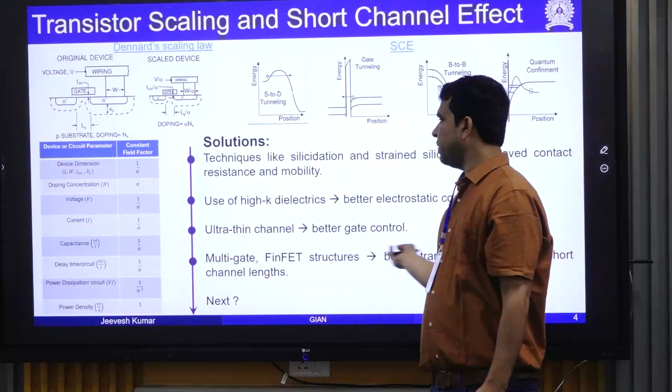So consistently this kind of evolution happened, right? And which evolution happened for what, that you can explore. That's a broad domain of course, there can be a separate course on that. But this kind of evolution happened consistently. Question again comes, what will be the next? So what is the main challenge now?

I'm explaining you what. Let's think about the material. This is a standard silicon material. Earlier, if carrier has to flow, the carrier was flowing into the bulk. If carrier was flowing into the bulk, all sides had a standard bonding. So there was no significant problem in flowing the carrier. If you read about a standard Kronig-Penney model and standard device physics, if the material is pure, then carrier will not have problem in flowing.

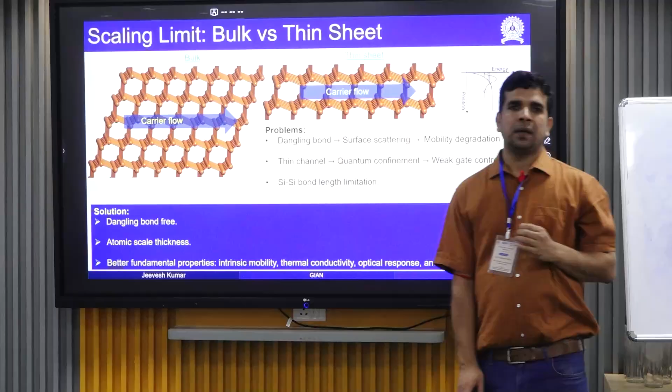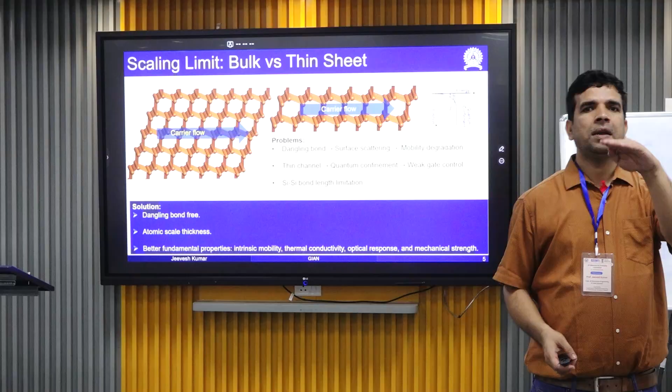But if you thin down the complete system, then what will happen? Surface has the dangling bonds. Dangling bond means something which is not bonded. Because in a standard silicon, a silicon in the bulk is bonded with 4 different silicon atoms. But for the topmost silicon atom on the surface, all its orbitals are not filled; it's a dangling bond.

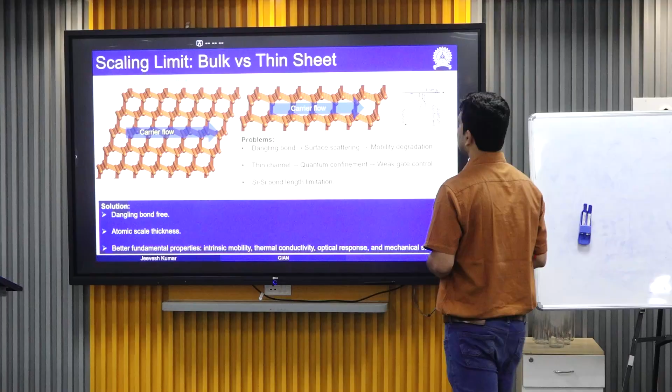So once the carrier flows through this, carrier can get trapped into those dangling bonds. There are unbonded orbitals which want to pick up carriers, so electron or hole can get trapped. This is a standard term in device physics known as surface and boundary scattering. Scattering means the electron gets scattered from the standard flow by the surface or dangling bonds. So if you shrink down consistently, your surface and boundary scattering becomes huge, and that will dip your mobility.

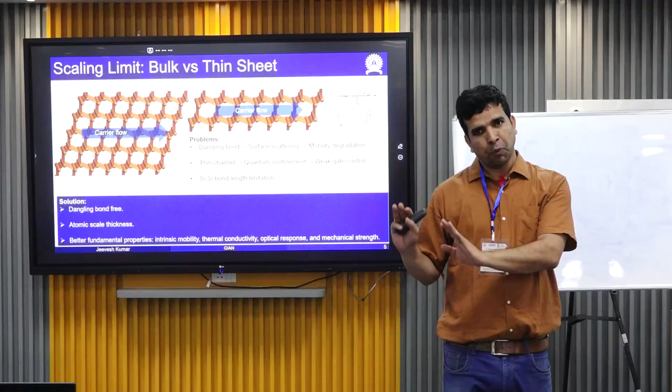So your mobility will get dipped down, and ultimately, if your mobility dips down, your device will be slow. There are many other problems, but this is the most fundamental problem. If you go for scaling, there will be a limit beyond which you cannot further improve the scaling in silicon. Different technologies are doing something else, but they are not ultimately modifying the scale.

Another problem is, if you study quantum mechanics, you read that if you confine any system, meaning you put boundary conditions, your probability of finding the electron or carrier at the edge will be less. So the carrier will try to be in the middle. It depends on which mode you are talking about, but the carrier will go away from the edge.

If the carrier goes away from the edge, then to control the carrier you have to apply more voltage. If the carrier is closer to the surface and you apply voltage on the surface, you can control the carrier easily. But if the carrier goes away from the surface, controlling it will be difficult. You have to give more and more voltage. So these two are standard problems.

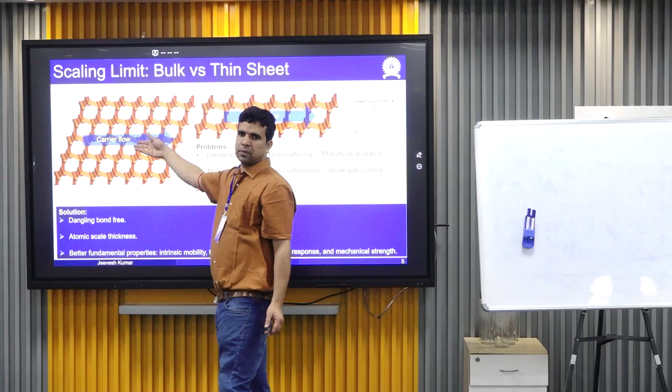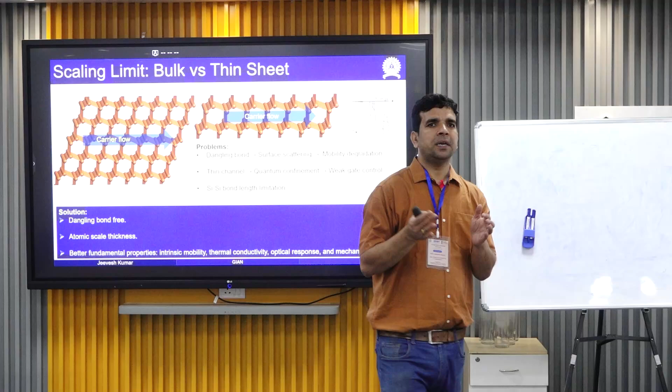It's the other way around. For the mobility part, you try to keep the carrier away so that you don't have more boundary or surface scattering. But if you keep your carrier away, controlling it will be difficult because you have to apply more voltage. So you want it near the surface. These are the standard problems: mobility degradation and weak gate control. And if you shrink down consistently, at some point there will be a silicon bond limit.

So what would be the solution? First, make your surface dangling bond free, so that boundary scattering, especially surface scattering, goes away. Second, go to very thin atomic scale thickness, so the electron has no space to go away from the surface. Atomic scale thickness means the electron will be confined in that atomic scale thickness only, so you can control it from the gate.

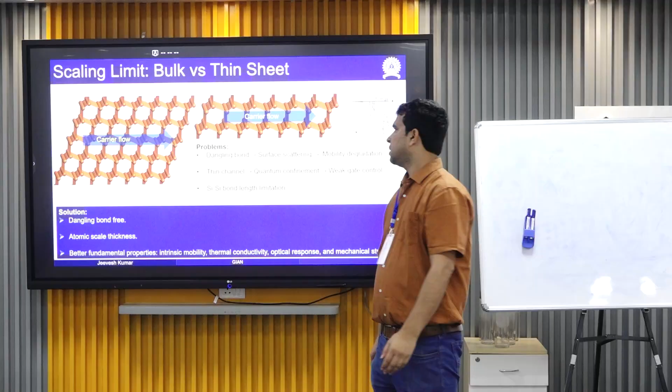And another is to find some material which has better fundamental properties than silicon, or at least comparable to silicon, with dangling bond free surfaces and atomic scale thickness.

Okay. So people started thinking about that. So what is the minimum thickness so that the charge will be only on the surface, free motion? That will depend on how much voltage you are applying from the top. That's what I'm saying. If you make it very, very thick, there's nothing for minimum. It all depends on how much voltage you are applying and how much your boundary potential is.

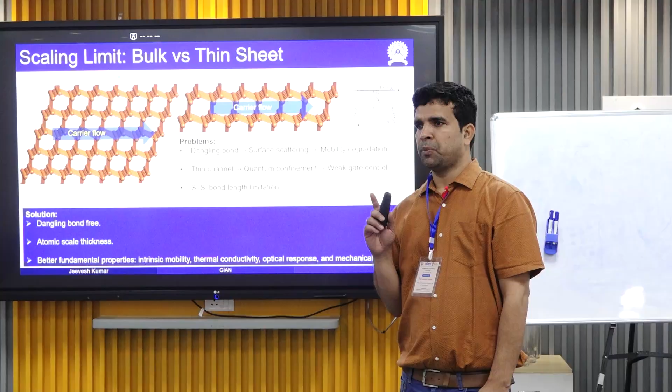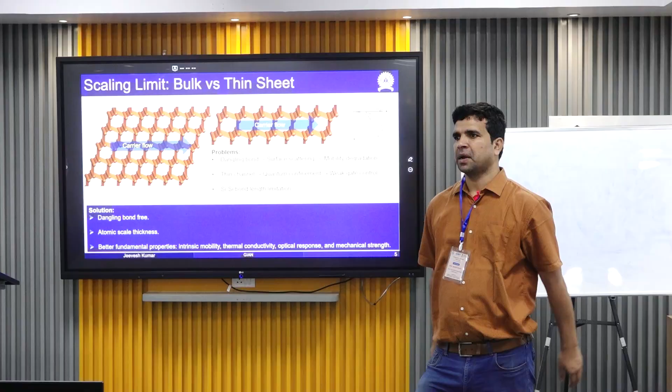If you solve the Schrodinger equation, then based on how much boundary potential you are applying and which mode you are talking about, wherever you get the peak of your charge depends on that. So it will depend on how much your boundary potential is. So there is a concept of minimum. Even if it's larger, if you handle the fundamental mode, then you can get it. So it depends on different conditions. Right.

So what are people doing basically? People are working in two fields. On one side, industry mostly, and of course some academia also, they are trying to stick to silicon only, and they are trying to evolve different kinds of transistor architecture to deal with this technology. If you study the history of the transistor, earlier it was the planar transistor, then the bi-gate transistor came, multi-gate transistor came, FinFET came.

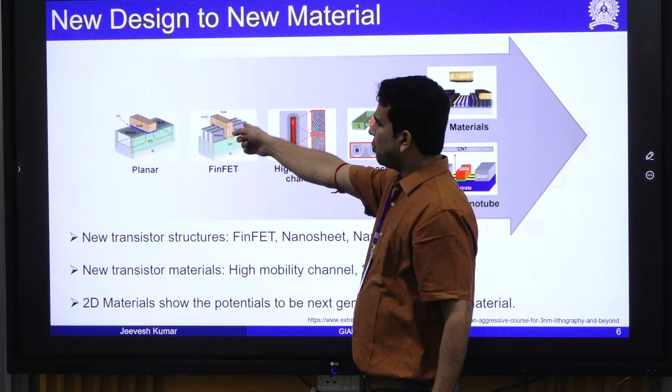They are dealing with these problems mostly by having more gate control. Since the carrier is going away from the surface, they are wrapping the gate around the channel. Let's say this is your channel: earlier the gate was only on the top, so they were controlling the channel from the top only, but then bi-gate came, you have a gate on this side also, then FinFET came, bringing gates on this side and this side also, so that you can control from all directions.

Then something more advanced, gate-all-around, came. That means wrapping the gate around the channel so that there is control from everywhere. Then they strained the channel so that they get high mobility and all those things. So basically, they are consistently improving the transistor architecture to deal with different technologies.

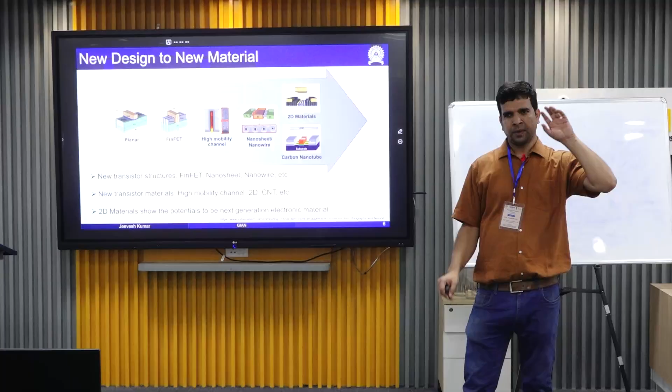And the other community, the research community, is trying to modify the material, different materials. So two sides. One is industry or some academia, they will refine the silicon transistor, but they know that sometime a limit will come. On the other side, people are trying different materials which can replace silicon in future technology. And from this point, 2D materials came into the picture.

Okay, so why did 2D materials come into the picture? Because of three fundamental reasons: dangling bond free, atomic scale thickness, and better properties than silicon. At least, there can be others also. And 2D materials satisfy all three criteria. So what is a 2D material basically?

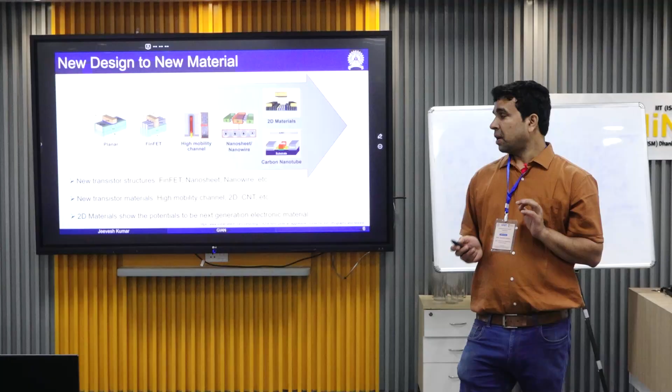In nature, 2D materials all exist in bulk form only, not in planar form. But as already discussed, 2D materials have in-plane sigma bonds. They are bonded in plane only. And out of the plane they just have van der Waals stacking, like one layer on top of another layer.

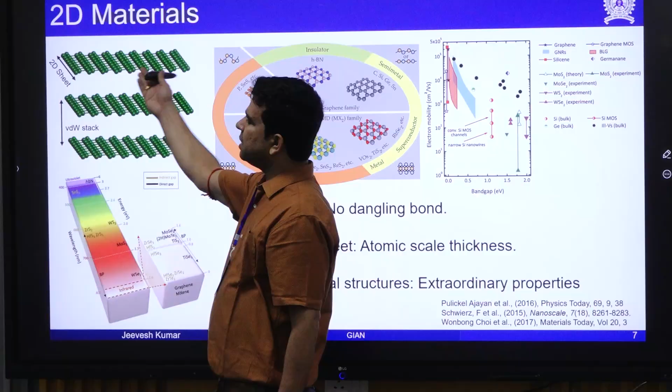This can be your single layer, bi-layer, tri-layer, but there must be van der Waals stacking by which the material is stacked. Right? So in this case you can easily peel off one layer, because the van der Waals force is very weak. So you can take one layer very easily, which I have discussed in detail. Fine. All of you are dealing with 2D materials, in fact.

Intentionally or unintentionally. All of you are using pencils, right? They're made of graphite. So if you are writing something, just a few layers are sliding down onto your paper, that's it. You are taking a pencil and scratching it, meaning layers are sticking on the page and you are just sliding them off. So you are already removing your graphite layer by layer when you write with a pencil.

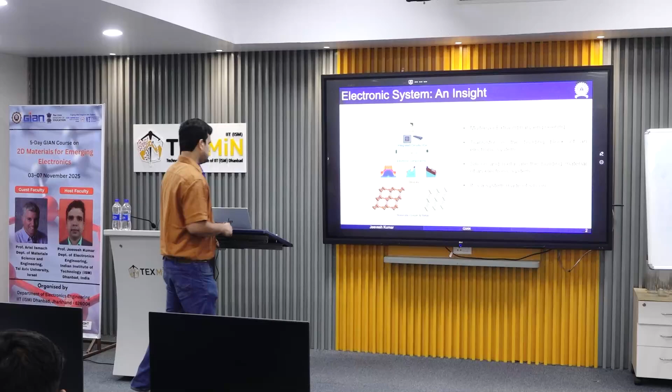So the first 3 days, Professor Ariel talked about the material perspective, right? We discussed different challenges in material growth and how to get the material using exfoliation and different methods of growth. Because whenever you have to deal with any material for electronics applications, the first part is to get the material, as pure as possible.

And then after you get the material, one question somebody asked me on day 1 or day 2: okay, I have a material in my hand, now what to do? So I told them, once I start the lecture, I will start from that point. You have material in your hand, and then what we have to do next. So I will give you an overview. Ariel gave you an overview of the material perspective; I will give you an overview of the device perspective. Then we'll discuss how to convert a material into devices, how to do different characterizations, and how to get different kinds of data for our engineering application.

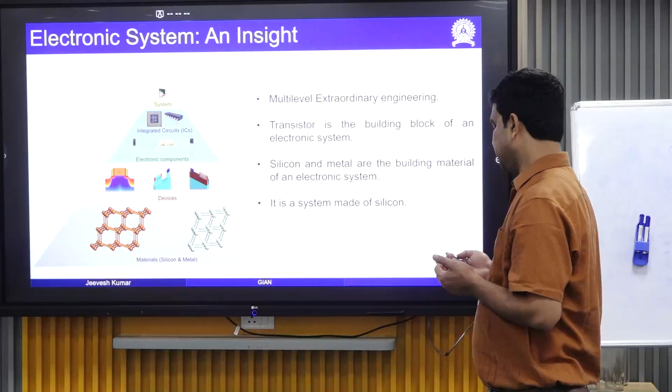So I think all of you must have seen the different material. Is there a mechanism to integrate this software so that the laser pointer can drag? Any idea? With the screen, what you mean? No, this is a laser pointer. The software also has something like that. Okay, we'll see. Leave it. PPT, sir. Leave it.

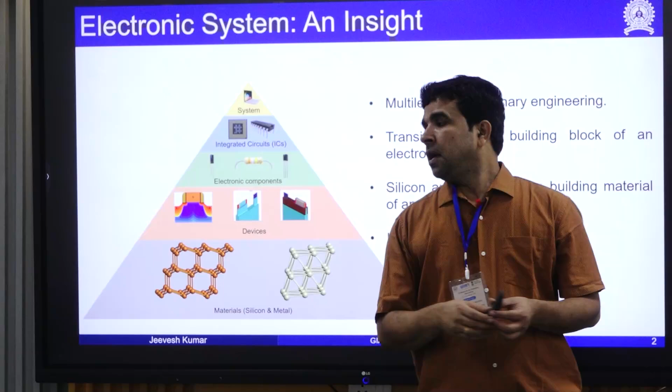So basically, if you take any electronic system and break it down top-down, some of you must have opened your laptop, right? You will see it's made of different ICs, integrated circuits. If you break any system, like a laptop or mobile, it is made of different integrated circuits. If you further break down these integrated circuits, they are made of different digital components: a multiplexer, FIFO, small memory element, register, counter, comparator or ALU, anything.

But ultimately, they are made of standard electronic components: transistors, resistors or capacitors. Usually inductors are not used much in further electronics. So there are 3 standard components: capacitor, resistor, and transistor. These electronic components are ultimately made of different devices, like standard silicon devices with different architectures: standard planar transistor, bi-gate, tri-gate, FinFET technology, all those technologies evolved, right?

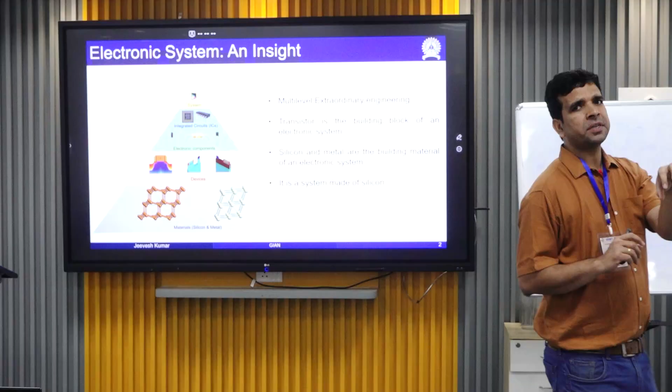And these transistors are mainly made of basically 3 kinds of material: semiconductor, metal, and of course dielectric. You need certain insulators, certain metals to interconnect, and certain semiconducting material required for your particular operation. So ultimately, to make any electronic system, you have to deal with atom to system, and at each step you have to do engineering.

From electronic component to system level is the job of the circuit designer or system designer: architecture integration, PDK design and other things. This is a lot of device design, right? And to explore or make certain new material, that is all for the material designer: how to make material and how to enable it for different devices. Understood? So ultimately you have to get a transistor. The goal of this class is how to get a transistor; the other part is the circuit designer's, so we will not cover those.

So basically, we talk about 2D material. But the question is, why do we need 2D material?

Why do we need 2D material? What's the problem with present silicon technology? If you know the present silicon technology, basically we are making transistors.

The silicon technology is for conventional electronics. If you have power electronics, then it may be either gallium nitride or silicon with different kinds of doping. But ultimately, we want to replace silicon with certain new material.

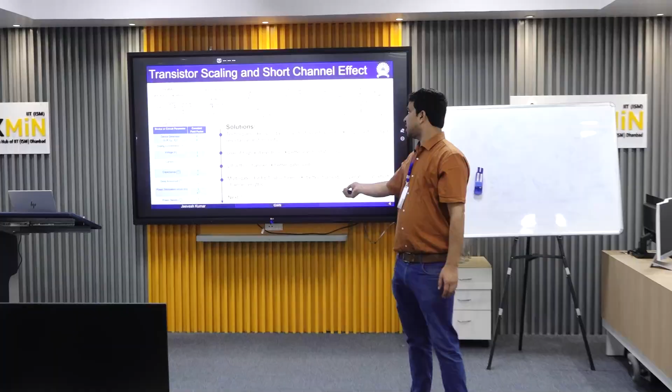And if you see the evolution happen in the transistor architecture - when I'm talking about transistor architecture, I'm talking about this level, different kinds of architecture. So what kind of different transistor architectures do we have?

Then basically high-k dielectric came into picture, and this is the most advanced technology being used these days, known as FinFET technology. So these are basically the device architectures of transistors.

Once you change the device architecture, correspondingly you see that the chip's number of transistors also increased. Initially a single transistor chip, then 16 transistors, 45 transistors, and the latest A14 Bionic transistor technology has billions of transistors in a single chip.

So consistently transistor technology evolved, consistently chip technology evolved. Once chip technology evolved consistently, you can see that your gadgets also evolved consistently. So you can think about how engineering at the device level modifies the final engineering at the gadget level.

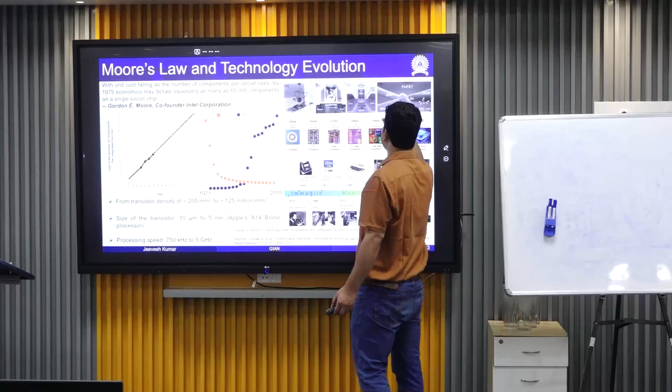But the question will be, if we consistently drive transistor scaling, till what point? Because whatever our goal is, we are shrinking down the channel of the transistor. But of course we shrink down not only the channel, we are shrinking different sides too - thinning down the gate or the body and everything.

Scaling means scaling from different sides. So if you do this, then there will be certain limits, of course. And what kind of limit will it be?

If you explore this, scaling used to happen with something like the standard Dennard scaling law. What Dennard scaling law suggests is that you don't need to dig deep - he suggested that you modify all the parameters of the transistor by a certain factor alpha. That's it. The main idea is to shrink down the channel length, whatever he suggested.

But if you shrink down the transistor consistently, I think this was also discussed - there are so many effects that evolved from around 2001 onwards. Those are known as short channel effects. There are different kinds of effects that came up, so I will discuss in detail.

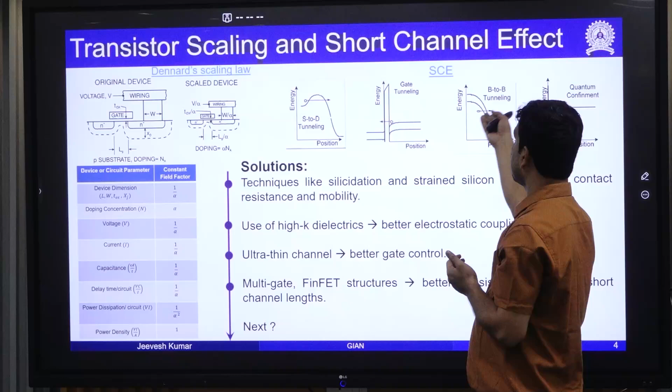You can explore this - that can be source to drain tunneling, that can be gate tunneling, that can be band to band tunneling, and that can be quantum confinement and other stuff also. So different kinds of problems start arising. And once different kinds of problems start arising, people are trying to address different methodologies to handle those effects, and people are trying to consistently enhance or improve our technology.

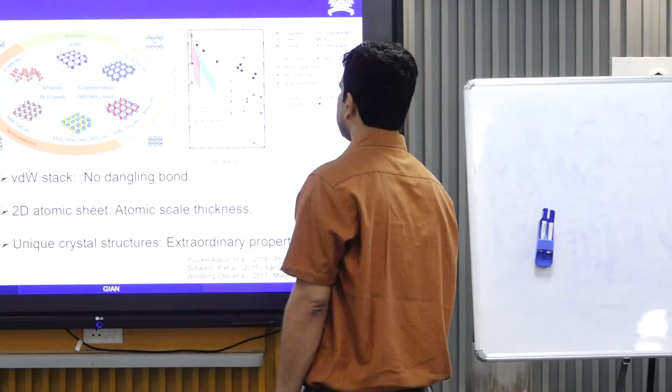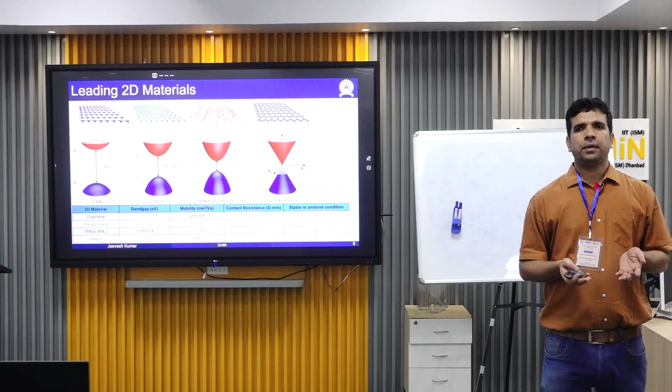From the family, of course there are plenty. If you go and explore, more than 700 or something have already been explored. Since the implementation of ML and AI computational technology, people are predicting huge numbers, going up to 30 million. But as a standard, there are 4 materials leading in the race now: graphene, phosphorene, TMD, and HBN.

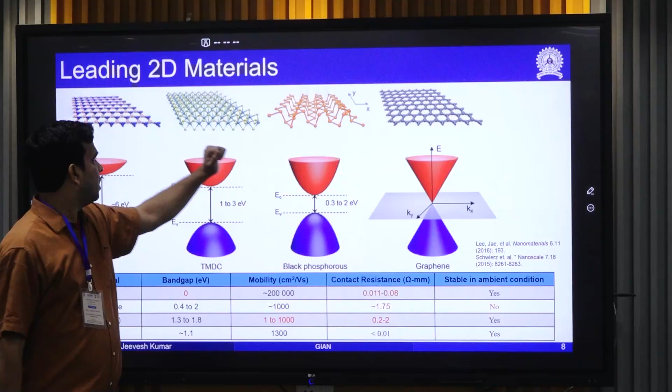What are these? Graphene is made of carbon, in-plane carbon single bond, which Ariel already discussed. Phosphorene, Ariel also discussed - this is basically a monoatomic 2D material. TMD, which is MoS2, MoSe2, WS2, WSe2, and many others, is basically a triatomic 2D material. Then you have HBN, which has a similar in-planar structure to graphene, but it's made of boron and nitrogen in-plane form instead of carbon.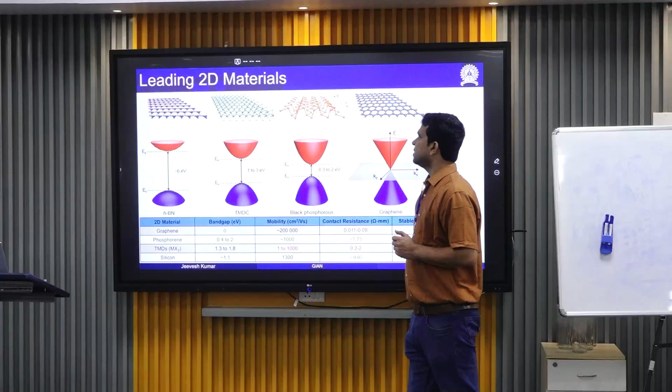Even these 4 2D materials will give you a wide range of applications and properties. Some I have highlighted here. Interesting thing is graphene has zero band gap, lots of carriers which we can control with the gate. Phosphorene, a beautiful material, has a very interesting property: its band gap will be direct depending on the number of layers. TMD has a significant range of band gap and mobility. And HBN is a wide band gap material, so you can use this as a 2D insulator.

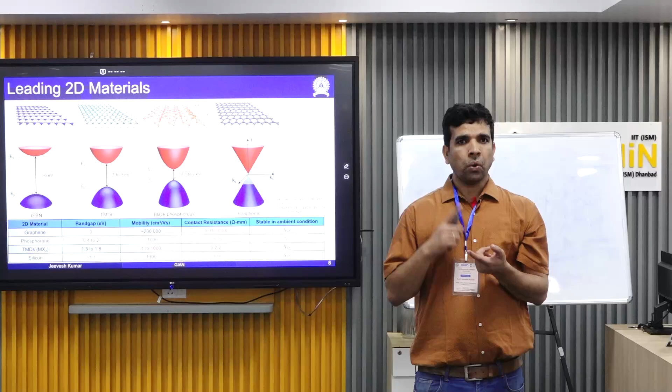On the application point of view, if you make any transistor, you need metal, semiconducting material, and insulator also - I discussed this in the first slide. So to bring a complete 2D technology, you need 2D semiconductor and 2D insulator too. Only then can you bring complete 2D technology at device level. If you don't get a 2D material metal, you can deal with normal metal, no problem - at least you need 2D channel and 2D dielectric. HBN is very interesting for 2D applications and wide band gap optical applications like UV.

One by one, if you see - graphene's very interesting fundamental property is zero band gap. It has a single atomic monatomic structure, and it has a very nice phonon band structure also. Somebody asked me 2-3 days ago, on the first or second day of the program, that some material does not have carriers, so how can it be a very good thermal conductor?

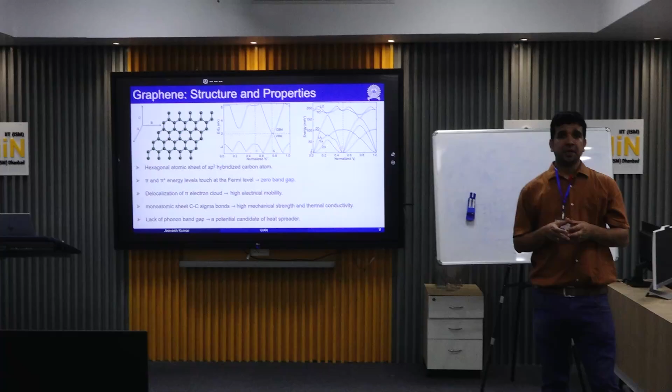Let me tell you clearly, electrical conductivity and thermal conductivity are two different things. Any material can be an electrical conductor only if it has a free charge carrier to move. Current is basically the rate of flow of charge - how fast your charge is flowing in the material. That can be electron, hole, ion, or anything. If you have a free charge carrier in any way, that material can be a good conductor - I'm not saying it must be, but it can be. The fundamental requirement for a material to be a good conductor is a free charge carrier inside it which can move once you apply an electric field across the material.

Thermal conductivity means talking about temperature. Let's say for any kind of material - whenever you talk about thermal conductivity, temperature basically means vibration of the material. If you're not dealing with 0 Kelvin, at higher temperatures all these bonds vibrate. So if you go and explore the fundamentals of temperature, it's basically linked with vibrations, which are known as phonons.

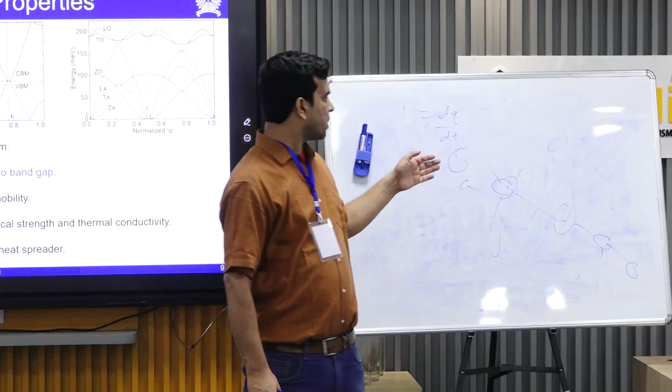In early days people thought only metals conduct heat well. If you talk about metal, the major contender to transfer energy from one point to another is the free carrier, because they move fast. Specific heat can depend on the carrier or on the phonon vibrations. But some other materials that don't have free carriers can still be very good thermal conductors.

It all depends on how fast this vibration propagates from one point to another. We can explore this using something known as phonon band structure, which I have calculated even for graphene. You can calculate phonon band structure for other materials also, which you'll cover in the quantum mechanics sessions.

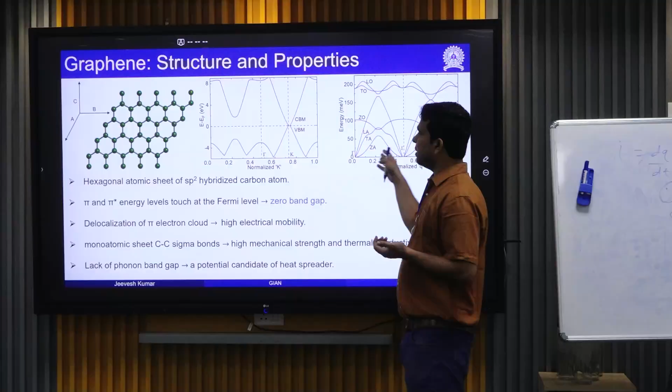Whenever you talk about band structure, you need both electronic band structure and phonon band structure. Basically you can know the dispersion, and only then can you explore the actual fundamental properties of the material: electronic, phonon, thermal, electrical. The beauty of graphene is that it has very high thermal conductivity also.

Usually people talk about graphene having zero band gap. What's interesting is that graphene has zero energy gap in the electrical band structure and in the thermal band structure also. Electrically, you can see there is no gap between valence band and conduction band. But thermally, if you explore the phonons, the material has two kinds: optical phonon and acoustic phonon.

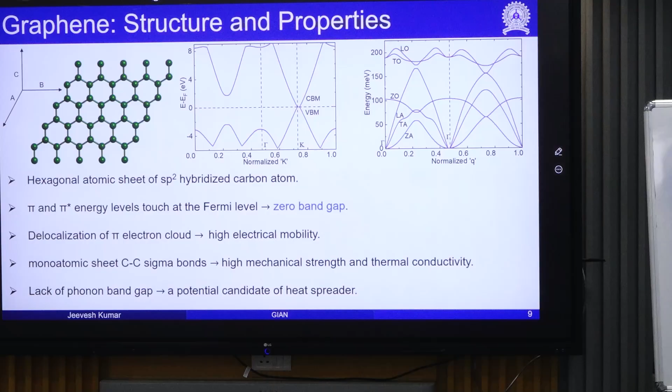Optical phonon means heat gets trapped somewhere in a standing wave, while acoustic phonon is a traveling wave, so whatever heat is generated at some point can travel. If there is no gap between acoustic phonon and optical phonon, they can exchange heat very fast from the optical energy to the acoustic phonon. Graphene does not have an energy gap between optical phonon and acoustic phonon.

This is another very interesting property of graphene. Whenever you generate heat at any point in the graphene, the corresponding acoustic phonon also has similar energy, so it can transfer quickly from that point, making the thermal conductivity of graphene very high - it can easily travel from one point to another.

That's why graphene can be strongly used as a heat spreader also. A lot of people these days are exploring graphene so that it can be a very fast heat spreader, especially in electronic chips. It can take heat at one point and spread it across different places. It's a different domain of investigation.

The major problem with graphene is the zero band gap. It does not have a band gap, so logic applications are very difficult to use. So one burning problem in the research is that people are trying to open up the band gap in graphene.

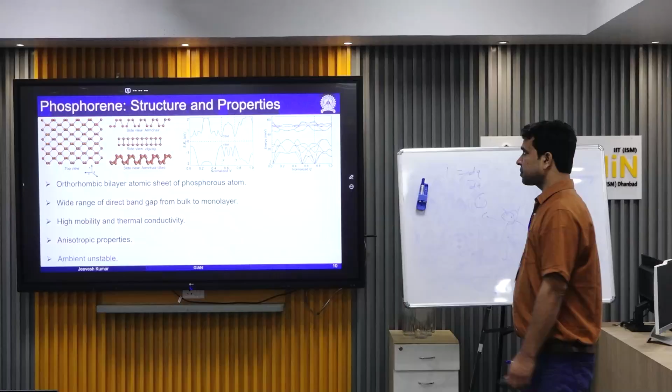Phosphorene. When you talk about phosphorene, it's a beautiful material; I like this material a lot, its properties, even more than graphene. Especially it has a tunable band gap, layer by layer. It has many different properties.

One big problem is that it's ambient unstable. If you leave phosphorene out, it will degrade automatically. So if you deal with phosphorene, you have to encapsulate it properly in some way so that you can deal with the material.

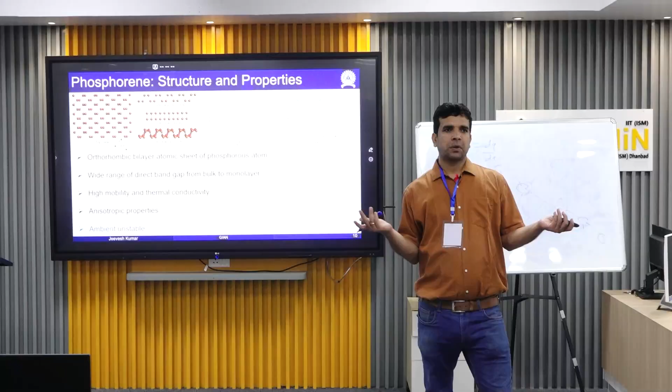Since it is ambient unstable and due to different kinds of reactivity, people are still struggling to grow this material. Unless you grow and synthesize it properly, it will not be scalable, and then you cannot use it at the technology level. So these are two challenges with phosphorene.

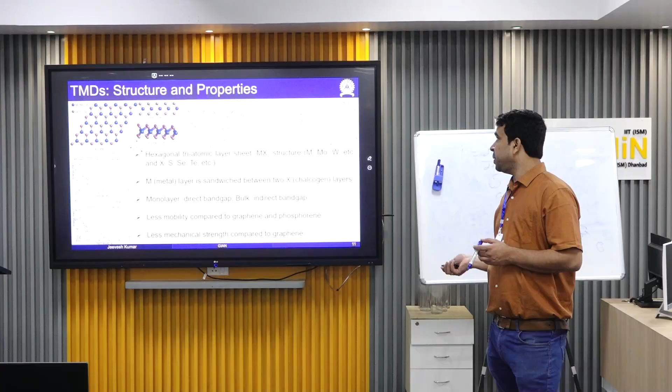And then TMDs. This is also a good material with different kinds of properties, but here the problem is it has lower mobility than graphene, even lower mobility than silicon. And another issue with all these materials is contact resistance. What is contact resistance? Let me discuss a bit.

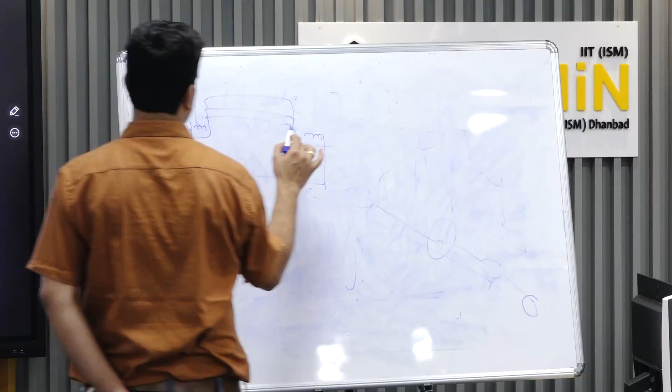So basically, what is resistance? Something that opposes or obstructs the flow of current. If you talk about a standard silicon transistor architecture, it's something like this. It has N plus regions; either can be source or drain, this is insulator, this is metal or poly, this can be the gate.

In any silicon transistor, once current flows, say you supply here, the electrons flow from this point through the channel. Don't think they flow only in a straight line. They can hit obstacles at each point. Whenever you deal with a material, there's standard scattering inside it, and a lot of scattering or resistance happens at the interface. The interface has completely different properties than the bulk material.

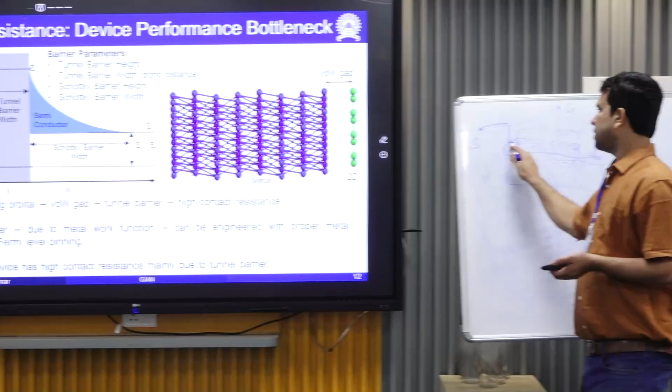So here, metal to this material is one interface, and then there's standard resistance in the channel, where electrons scatter with phonons. But at interfaces, two materials combine. One has dangling bonds, there can be lattice mismatch and different properties. The resistance due to the interface of the metal and a particular material is known as contact resistance.

In silicon, contact resistance isn't a problem because we have silicidation technology. Also, in silicon the channel resistance is significant and contact resistance is much less, so it's not very important, because we have high doping technologies. But 2D materials are different: all 2D materials have very high contact resistance.

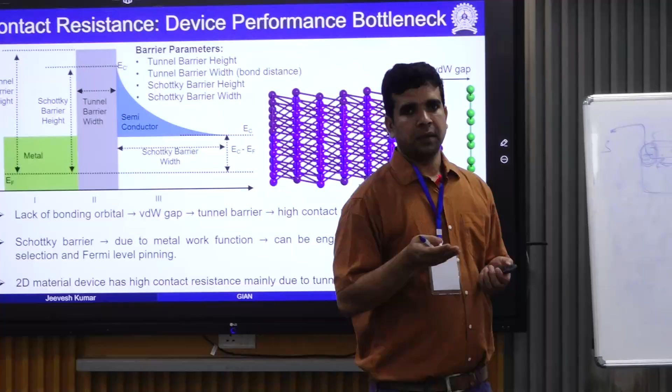If you make a standard interface, metal on one side and semiconductor on the other, there are different potential barriers. One is whether your metal comes very close to your material. Silicon or bulk materials have dangling bonds at the surface, so when metal approaches, these dangling bonds easily overlap with the metal's, and the interface bond will be relatively strong.

But if you talk about the 2D material, it does not have any dangling bond in this direction. Right? So if you put metal on top of any kind of 2D material, the bonding between the metal and the 2D material will be weak as compared to any other bulk material, because it does not have any dangling bond in this direction. Metal has, but 2D material does not have. Right? So what will happen?

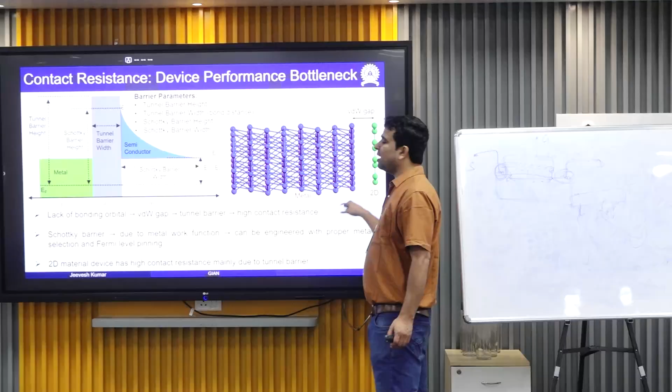There will be a gap between metal and the material at the interface, which is known as the tunnel barrier at the interface, because the carrier has to cross it. If you find out its potential profile, then there will be a tunnel barrier at the interface. Right? And then apart from the tunnel barrier, there is the standard interface potential structure, which is known as the Schottky barrier, that you can explore in the book.

So what are basically Schottky barriers? In any standard structure, one side you have metal, one side you have semiconductor. Right? So what will happen if you deal with any metal? First you find out the Fermi level. Fermi level is the level up to which your electrons are filled at 0 Kelvin. At standard temperature also you can think about that for better understanding. So at the Fermi level you have a significant amount of electronic states which are filled.

So if the carrier, or electron, has to jump from the metal to the semiconductor to flow, it has to come from this Fermi energy state to the conduction band of the semiconductor. It has to go in the conduction band. The valence band is completely filled. If you are talking about electrons, they will not flow in the valence band, so they have to go in the conduction band. So let's say that this is the vacuum level, and you have to align the energy of the electron properly to flow from this to this.

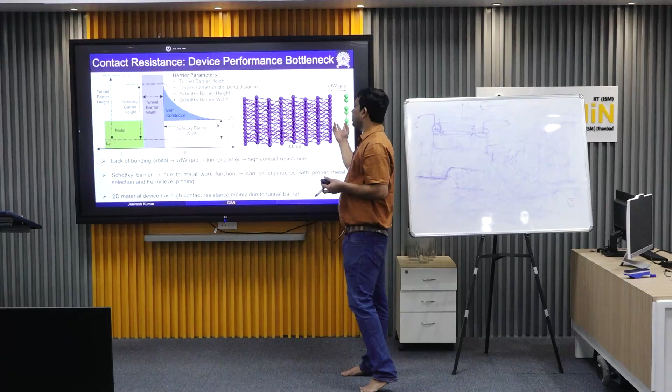How to do this? I did my whole PhD on that, so I'll discuss it. Basically, since you asked, the tunnel barrier is due to lack of bonding. Metal has the bond. Somehow you create dangling bonds in the graphene or in the material with certain defects. You remove certain carbon atoms, you create certain defects, and overlap of orbitals which are not saturated will be there. They can bond. We have done it computationally and experimentally, everything is verified.

You fix the carbon. Basically, you bombard some ions to knock off some atoms, with the fluence controlled. And here lattice mismatch will not be a problem, because the deposited metal is amorphous, not crystallized. So the amorphous structure settles on the material. So you create dangling bonds by removing atoms.

How about other materials? I'll discuss about it. I will not discuss the device flow. We are not putting anything there. Any other question?

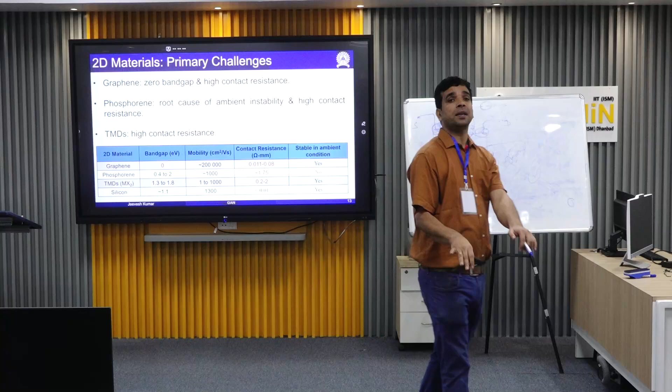So basically, if you list down challenges in different 2D materials, these are the primary challenges. Graphene has zero band gap and high contact resistance; deal with both things. These are fundamental primary challenges. After that, more challenges will be there. From the growth perspective, as discussed, there are a lot of challenges. I am talking about the device perspective.

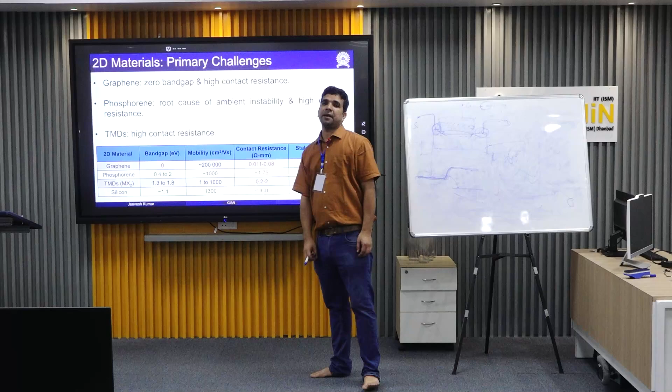Device perspective: graphene, open the band gap somehow and reduce the contact resistance. Phosphorene, find out the root cause of the instability, encapsulate the material, and it also has high contact resistance. TMD, of course, has high contact resistance. These are the primary challenges you have to address. Once you address them, you can enable 2D material for technology at the primary level, not the final level.

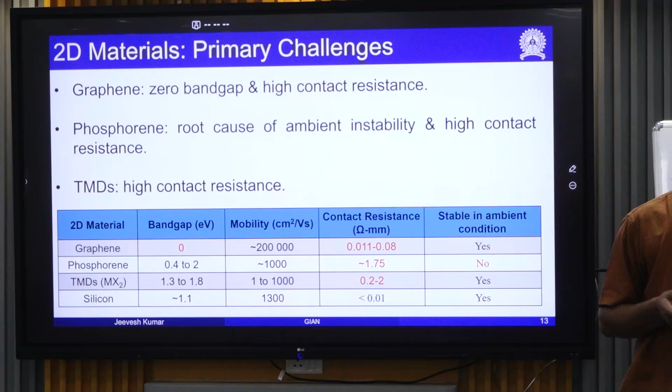Because I'm talking about material; then problems will come at the device level, circuit level and system level, which is a different story. So it's a long journey. So how to address those primary challenges? For that you have to do consistent research and engineering on the material. So how to do it?

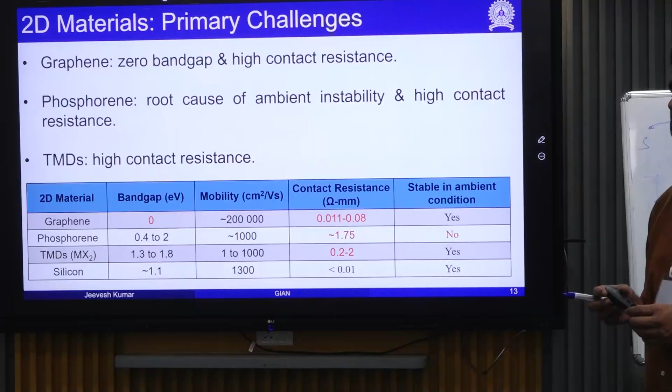One thing: you can easily open the band gap in graphene, by applying external voltage or by chemical coating, right? No, it's not easy. Don't say it's easy. By applying external voltage, you cannot open the band gap easily. How much voltage can you apply? And you drastically decrease the mobility. Have you tried?

Yes, you can open a bit, especially in bilayer graphene, not in monolayer graphene. In monolayer graphene, opening a band gap is very, very difficult. Theoretically, DFT will tell you that you can, but it will degrade your other graphene properties. Opening a band gap in graphene sounds easy, but it hasn't been achieved yet. Still people are trying to achieve it. Okay.

Chemically also, it's not easy to open the band gap in graphene. Some people may claim that you can put oxygen plasma and get a band gap. Actually, it's not graphene, it's basically graphitic oxide. They are converting graphene to graphitic oxide. It's a different material, it's not graphene. When you convert to a different material, you can make a diamond. Keeping the properties of graphene and having a band gap, nobody has achieved yet, as far as I know.

So how can we reduce the contact resistance? We'll discuss it. So basically, the question is, if you have to deal with primary properties, then how to do it? First, you should have the material in your hand. Then you have to convert that material into the FET structure. Once you convert into the field effect transistor structure, only then can you find out the mobility, the contact resistance, and other properties. So you have to learn how to convert material into a FET structure. Clear?

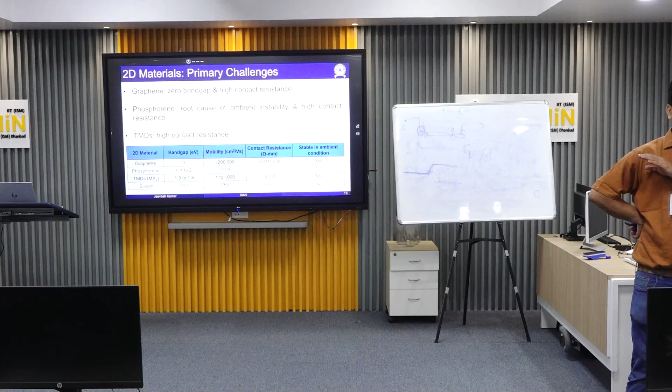So if you talk about a standard silicon transistor, once again, what is our goal here? You have to make a standard FET structure. A standard FET structure means you need a certain material. Then you need two contacts for source and drain, which can be metal contacts. This 2D material will be on a certain substrate. This is your substrate, and on this substrate you have the 2D material.

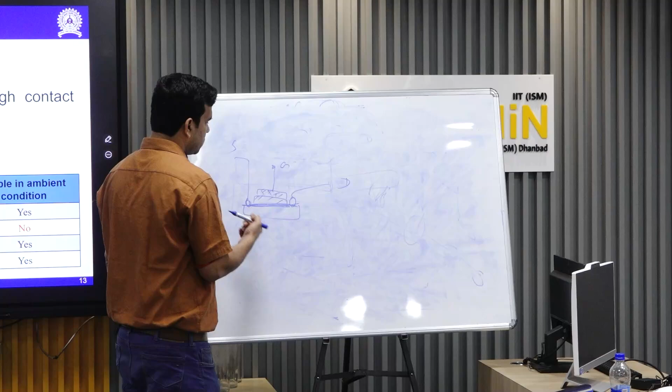And then you need a gate. Gate means on the 2D material you put a certain insulator, then you put metal. This will be your gate. So you need source, drain, and gate to make any kind of FET structure. Source and drain are normal metal contacts with the material: put metal at two points. For the gate, first you put a certain insulator on the 2D material, and then you put metal.

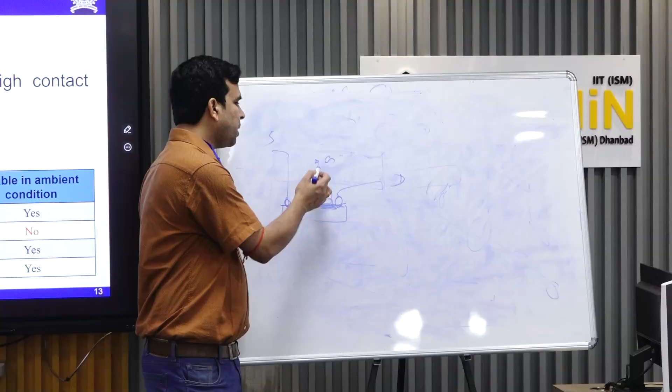Usually, most of the substrates you are using are insulators only. So we investigate 2D materials in two ways. One is known as a top gated device, one is known as a back gated device. Top gated device means you have the material, deposit a certain insulator first, and then deposit metal. This can be your gate. So this is your top gated device.

A back gated device is very easy because you already have insulator below the 2D material. Your substrate is an insulator. Just somehow make this surface conducting and you can put the gate here. So remove this part. This is the material, which already has insulator. Somehow make the bottom conducting and you get the back gate. You can get that easily: just put the substrate on some metal, that's it. Fine.

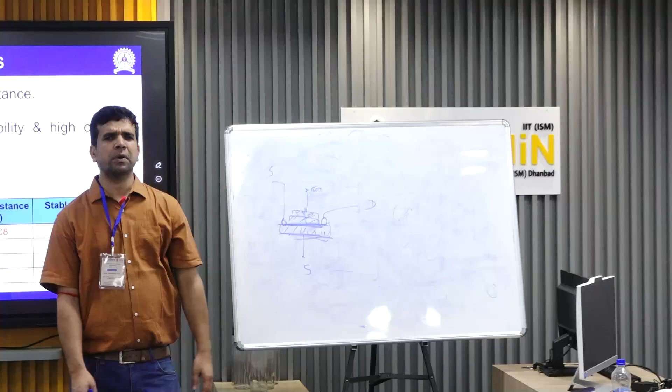For top gated, whatever dielectric or insulator you're using, the thickness will be in nanometers, right? But the wafer substrate you're using is in micrometers. Very good question. So basically, he asked that if you put a gate, the insulator doesn't have to be a few nanometers, it can be 100, 200, 300 nanometers. But the substrate can be in the range of micrometers or higher. So how to deal with it? Usually there are two methods.

Usually with a standard substrate, you are using silicon dioxide on silicon, with doped silicon. If you dope the silicon substrate, it has free carriers. Then on the silicon you put oxide on top, I think around 90 nanometers. So this part is conducting, and only on top of the silicon you have around 90 or 180 nanometers of silicon dioxide. And then you put your 2D material on top.

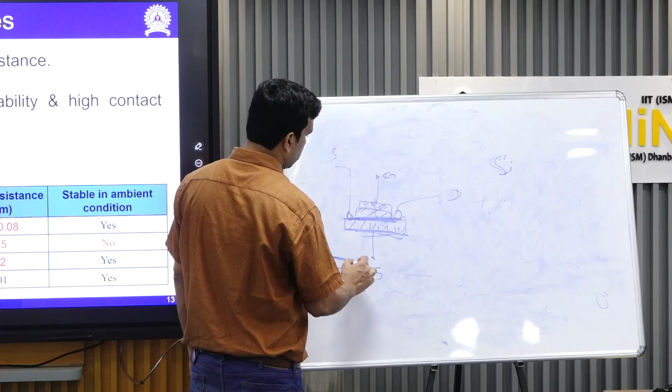So your substrate width is actually this, but from here to here is a highly doped P-type or N-type wafer. If you buy a silicon wafer, it will ask you whether you want a P-type or N-type wafer. That means from this point to this point, it is conducting. The only insulating part is here, which is silicon dioxide. That is in the range of nanometers.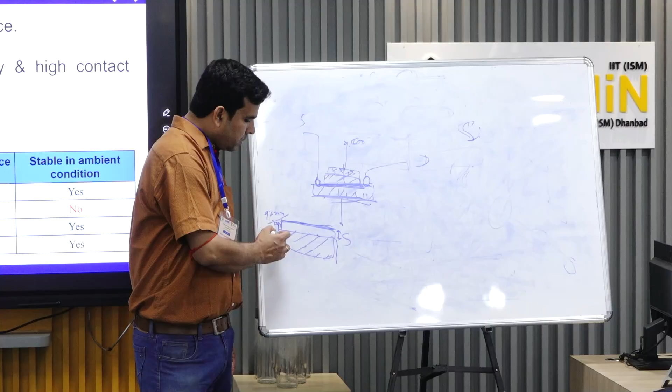Clear? Another thing is, if you go for a top gated device, you have to deal with a lower gate voltage, in the order of volts, 1 volt, 5 volts. But if you go for a back gated device, if you increase your width, then correspondingly you will scale your voltage. Let's say you increase the width 5 times, you increase your gate voltage 5 times, and things will be done, no problem. So with a top gated device, you deal with 1 to 5 volt gate voltage. With a back gated device, you go for 30 volt, 60 volt gate voltage.

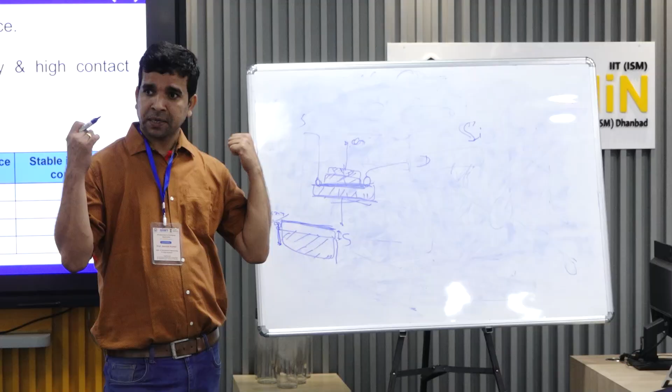Source and drain are also far. Source and drain are in top gates. So ultimately, you need some gate contact to control the channel conductivity. That's it. So at the initial research level, a back gated device will give a lot of advantages in making a device. Making a back gated device is very easy compared to making a top gated device. So for initial level 2D material research, I suggest people just make a back gated device. It's very easy. I'll discuss the process flow.

You can make it very easily, but to go for a top gated device, you need triple layer or double layer masking, and you need a lot of lithography. So I'll discuss the process flow of how to make the device. Okay. Any other question here?

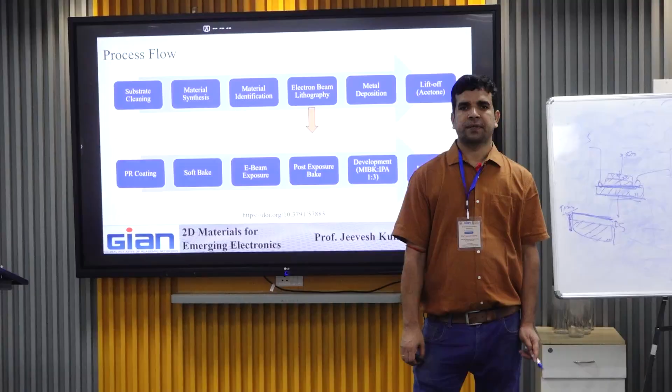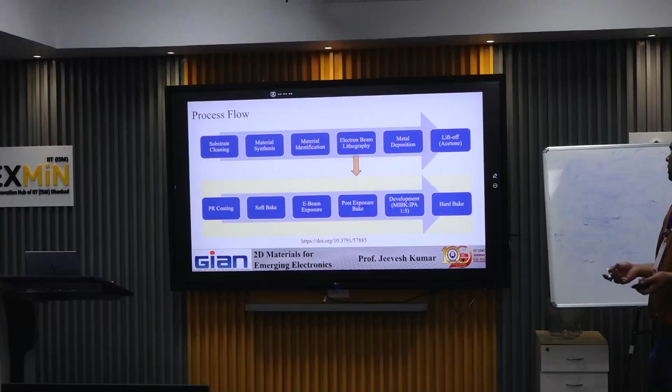We have already discussed different synthesis methods of 2D materials, so you already have that. Now we have to convert your material into the device. So what's our primary goal? Let's say you have a 2D material. First we'll discuss how to make the back gated device. How will a back gated device look? I will make a back gated device with a silicon substrate. So you need a certain structure.

This will be silicon. This will be SiO2. Then you will have the 2D material on the top. And then you need contacts at two places: source and drain. You need this kind of architecture, right? Your gate will be the back gate, right? And how will you get the 2D material?

So you can think that if you are doing the processing and one hair falls on your sample, it will cover everything. You can go and explore on the internet. Your transistor size is smaller than your blood plasma size also. So you can think how clean a process and how clean an environment is required to do all the transistor processing. That's why most of the things we are doing are in a standard clean room. We can explore the clean room, or if you need more discussion, we can have a separate session on how the clean room works.

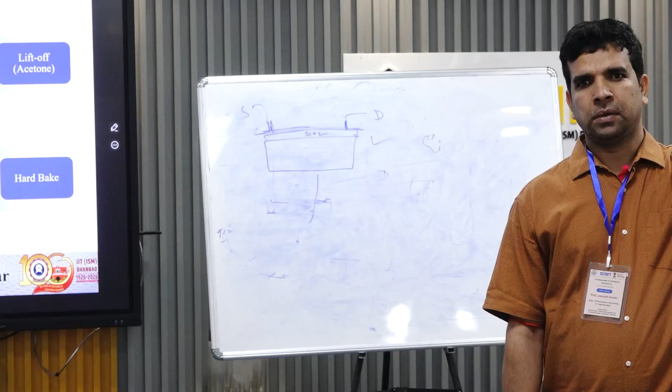If you want to know how it's made, then go and study the silicon wafer fabrication method. You can explore that, it's a separate course. But in the market, for around 2500 you can get a full wafer. An oxidized full wafer for 2500 or 3000 you can get in the market, and you can dice it and convert it into dies.

Right? And then you can take the scotch tape, take the Si/SiO2, and just exfoliate. After exfoliation, you can look under the microscope, and based on the contrast and based on Raman, you can find out monolayer or bulk material. So till this point, all of you understood, right? So till this point, what step do you have in the end?

Silicon, then SiO2, and then 2D material. So up to this step, I think you don't have any problem, right? This is p-type or n-type, this can be conducting. So conducting insulator and the 2D material. This step we have.

So in the back gate, you just have to worry about creating two contact patterns. That's it. Because you already have the gate prepared here. Just you have to create two contacts for source and drain, and your whole FET structure will be ready.

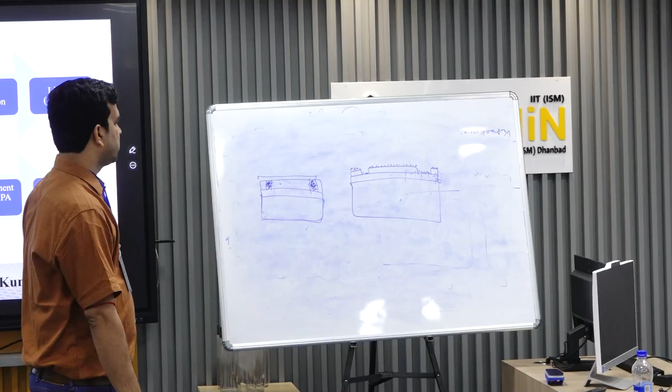Because you evaporate metal everywhere, so metal will come everywhere. Fine. So, if you see now, here is the catch, and this is the main thing which you have to optimize. See, if this thickness is...

...very small, then this metal and this metal can get connected, so everywhere metal will be connected. So you have to keep this thickness large enough so that there is no connection between this metal and this metal. Are you getting this or not?

Because as you deposit, metal keeps getting deposited. If you deposit for more time, then this trench will get filled and this can get connected with this. So there should be a proper trade-off between your resist thickness and deposition time.

And deposition time you cannot compromise much, because you need a certain thickness of metal here also - your contact needs a certain thickness that you want. So if you want this certain thickness here, you have to deposit for a certain time, but that should avoid getting overlap with this. So this resist thickness has to be significantly larger than the thickness you want here.

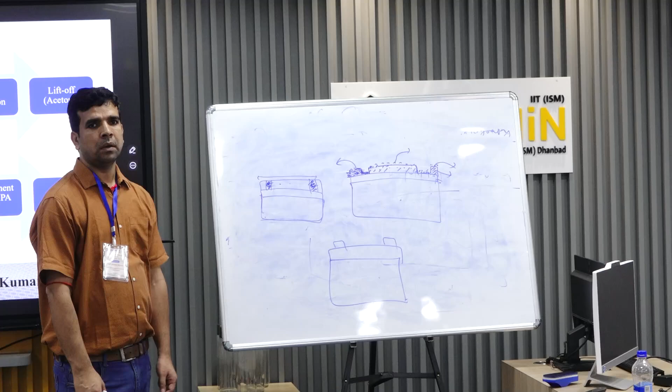Understood? If this is not optimized, if there is a connection between here and here, then your whole metal will go away. So there are a lot of failures that happen in this process known as lift-off. This is known as lift-off.

So there are a lot of failures in the lift-off process, because if you have not done spin coating properly, or if you have not optimized your deposition time properly, if there is any connection between here and here, or here and here, or here and here, your whole metal will go.

So that's why if you go for any kind of process flow, it must not be random. There are completely crystal clear protocols. How much should be your spin coating time, how much should be your baking time, how much should be your deposition time, how much should be pressure, how much should be temperature - everything has to be precise.

If you deviate a single parameter at any point, it can be a failure, you may end up with a failed structure. If it is successful, then you have a standard backgated FET here, where this will be your source, this will be your drain, this is your oxide, and you put metal - this will be your gate. But in fact the gate is connected to this point because these are all connected.

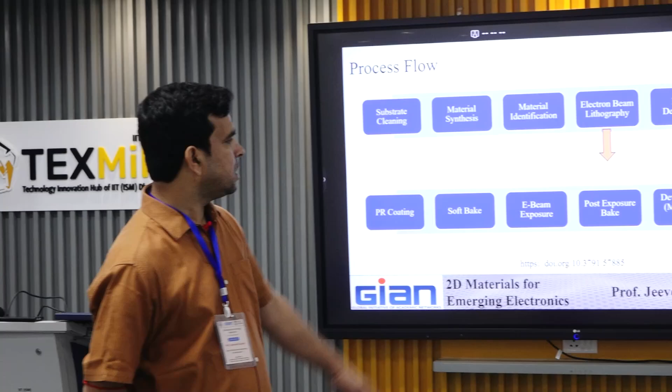Fine. Question. This point till here is not your conducting line.

Now you put any metal thing, you put this on the surface, there will be contact here. But if your downside is unpolished, right? Wafer downside is unpolished or completely silicon. So that's why if your downside is unpolished, then what will happen? There will be certain insulator. That's it.

But ultimately you are putting voltage, so gate control - there will be certain, it's a very good question. So he's asking that if you are taking a wafer, its downside is polished. Yes. So whenever you go for any kind of oxidation, it protects both sides - it will protect the top side also, it will protect the bottom side also. So it will reduce your effect, it will increase your effective gate oxide width.

So ultimately, if you are taking this as 90 nanometer, then ultimately one oxide is here, one oxide here - so it can be 180 nanometer. It will not affect your gate control. If you apply the voltage, gate control is what? You change the voltage here and you want some effect here, so that field effect will come here, it will not give you problems.

Limitation of backgated, sir? Huh? Limitation of backgated, compared with the top gate? It's on the technology level. Yes sir. See, first thing, if you are going for a research perspective, backgated device will give you ease. Now see the complication of top gated.

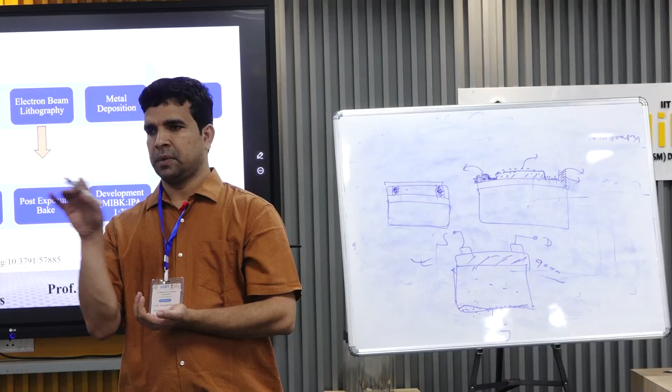But in the latest integrated circuit technology for sensing applications, they are using top gate schemes, because they have a different kind of technology where the gas can go. They are not using backgated much, but today we will use the backgated. So what's your question? I'm saying they are using top gate for sensing also.

Is it possible to monitor thickness in situ? In situ means spin coating with real-time thickness. Even after that, you can measure using an ellipsometer. You do spin coating and then ellipsometry. There is a Dektak also, or any other kind of optical characterization. In situ means you integrate your spin coater with that instrument, integrating fabrication and characterization together.

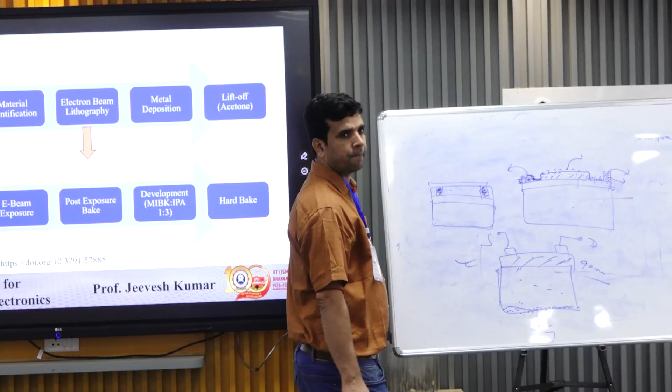With this silicon oxide, the same configuration, let's say before doing anything I etch out part of the silicon oxide, so I have silicon oxide as well as silicon exposed, and I make a contact there for the back gate. Instead of placing it there, I just remove part of SiO2. That will give you a lot of process challenges.

First you have to do etching of SiO2, and for etching you first have to do lithography, because ion etching bombardment will expose everywhere. So you mask other areas and expose only the area you want to etch. Lithography, etching, remove resist, and then deposit metal. If you do so, you can achieve the same thing, if you can handle the process.

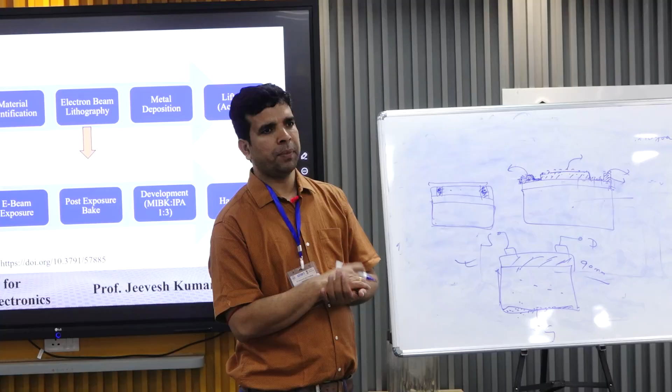But why would you do that? You can go to the top with it. No need for etching. Deposit the insulator directly and deposit metal. Any other question?

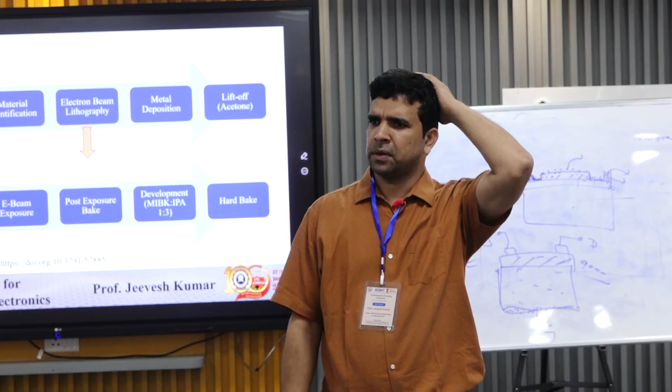The spin coater, Harsh will show you today's second half, or tomorrow. We have a spin coater in the lab. Harsh will mount one sample and rotate it. It's working, tested today. Dropcast just DI water or something and show them the spin coater, so you can use it. And deposition is another thing we have in the CRF and another lab.